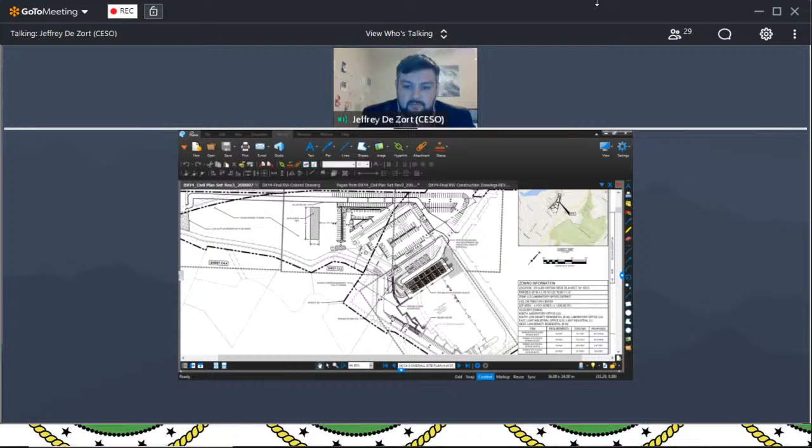If Jeff De Zort can share his screen, just so I can reorient the board. I know it hasn't been very long since we've been back, but just to put things back in a visual perspective for you. Gene or Cheryl, could you give me permission to share my screen, please? Thank you. Are you good, Jeff? I got it. It should be popping up here momentarily. Okay. Should be seeing a picture of the site plan. Yep. Okay. Thank you.

So as you recall, we were here a few months ago. We received site plan approval on July 8th of this year for work related to Amazon's proposed delivery station at 200 and 400 Ortani. We are here tonight requesting amended site plan approval for some minor technical amendments to the plans, as I will let Jeff go into more detail in a few minutes. Those changes include revisions to the stormwater management design and the inclusion of a new retaining wall. The new stormwater management design is now being proposed as an underground detention system as opposed to an above ground detention system as was previously approved by this board. The amended stormwater management design will still provide the same quality and quantity mitigation as this board previously approved, and will also comply with all the town, county, and state requirements.

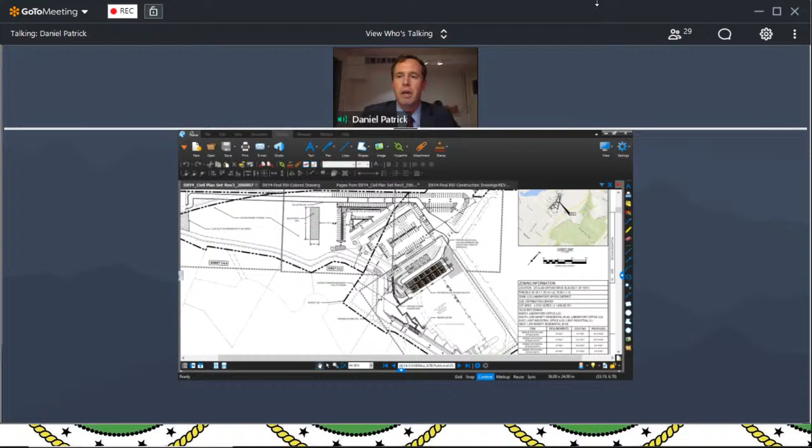Amazon is also still including the catch basin inserts, which we previously proposed as requested by this board to achieve the desired oil and water separation. With regard to the retaining wall, it will be an approximately 122-foot long retaining wall. It will stand between 2.5 to 5.5 feet tall. It'll be located between the Associate Drive and the van loading area, where Jeff is pointing at right now.

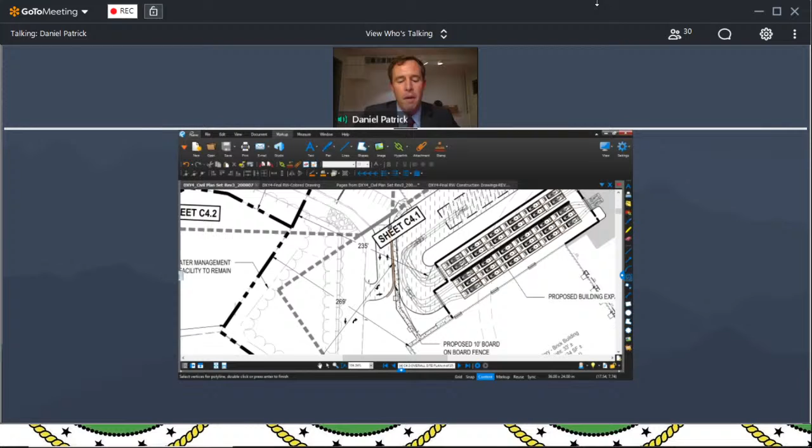As I will let Jeff show in a minute, we also have provided the site diagrams, or the line of sight diagrams that this board previously requested with regard to the actual building itself. As shown on those diagrams, Jeff can walk through and provide a little more detail about why this is required and the engineering reasoning behind it. But the line of sight diagrams do show that the retaining wall is not visible from the property line, so we're not expecting any aesthetic impacts to be created.

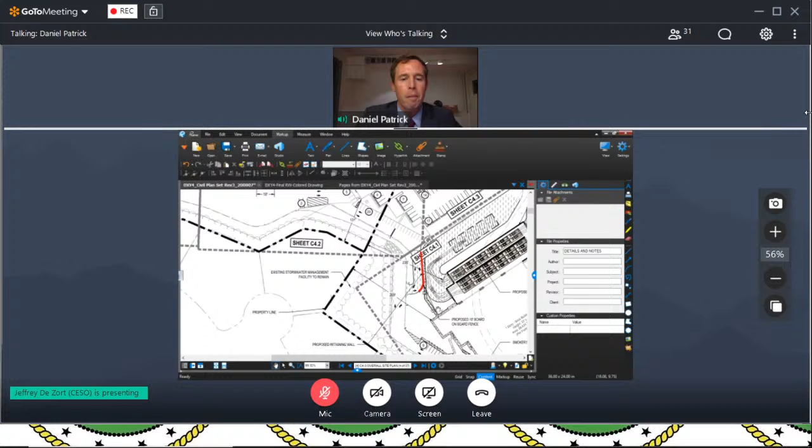So that's just a brief overview of the amendments that we're here for approval of tonight. I will turn over to Jeff in a moment, but as indicated, we're hoping to obtain approval for these amendments. They're very technical in nature. We don't think they change the project or the site significantly. We are also asking that this board waive the need for this application to be referred to the ACABOR. It's our understanding that the retaining wall would require ACABOR approval, but in this instance, since the remainder of the site has already been approved and these changes are rather minor and will not be recognized or noticeable off-site, we think it's appropriate for these minor improvements to not be referred to the ACABOR, if that board feels more inclined to waive that. So I will turn over to Jeff right now and ask him to go over a little more detail about the proposal and the reasoning for these two changes.

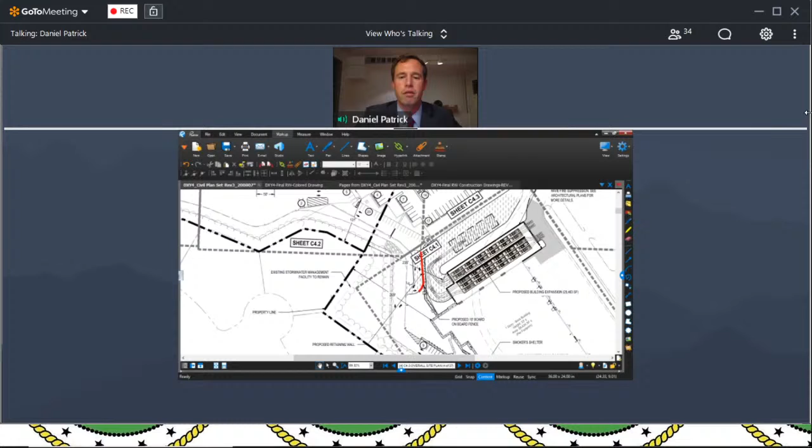Great. Thank you, Dan, and thank you, board, for taking the time to hear our proposal. So as Dan mentioned, the two major site amendments or revisions to our approved site plan are in regards to the stormwater management system as well as the retaining wall.

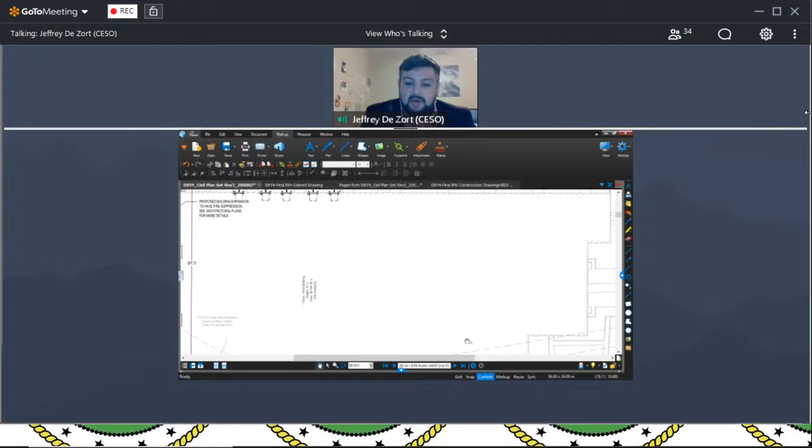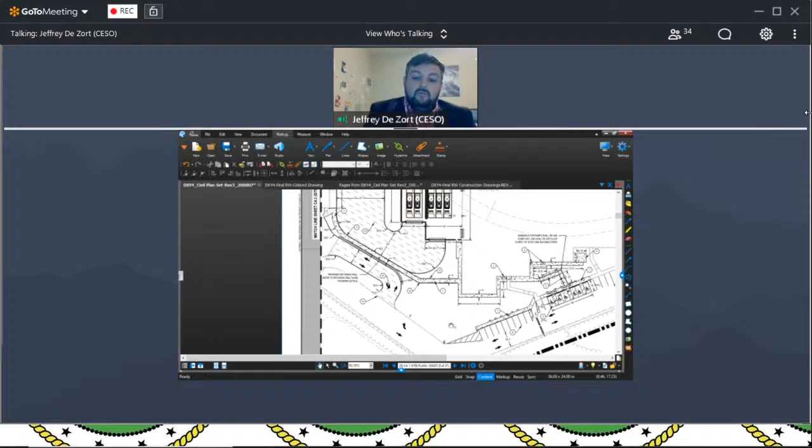For the stormwater management system, originally proposed was an above ground detention pond located in the southwest corner of the building in a grass area. It was in this area where the original pond was to be placed, and that was going to be an infiltration pond where stormwater for the site would flow, discharge, and fill up. Then, as the pond filled, it would overflow and would be piped to the existing detention basin that's on the site.

Due to the geotechnical analysis performed on the infiltration, as well as some minor changes in the grading of the site, the above ground detention basin was no longer a feasible option for us from a sheer volume perspective. We just couldn't get the amount of volume needed to meet all of the local, county, and state regulations regarding water volume and water quality.

So our alternative was to redesign and install an underground detention basin. Hydraulically, the underground detention basin acts the same way as an above ground pond. All the water will sheet flow from the site to catch basins.

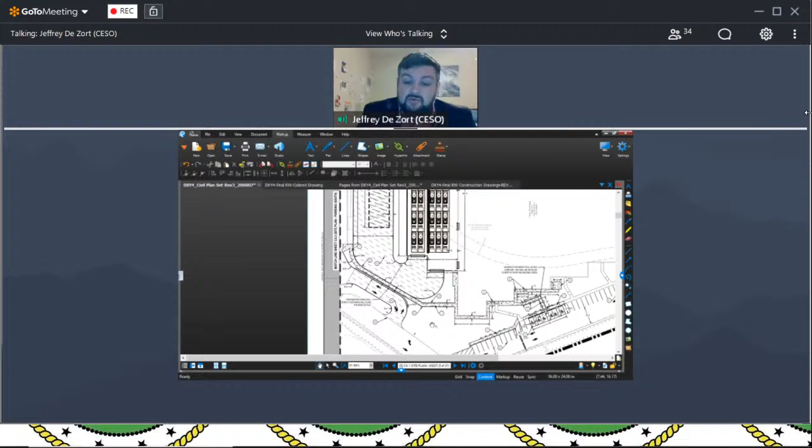From the catch basins, they'll enter into an underground detention system, which I have a picture of. It's a StormTech system made by ADS. Here's a picture - it's an arced chamber, a plastic chamber that's buried in a bed of gravel and connected by plastic pipes.

As the water flows into the catch basins that have inserts for water quality and for oil and water separation, it'll flow into these underground chambers - actually it'll flow first into what they call an isolator row. That isolator row provides additional water quality measures by trapping any type of floatables or similar material that might enter into the system. It'll go into that isolation chamber, collect there, and won't have the ability to leave.

That would be a maintenance item that is part of the maintenance and operation plan required by the town and that needs to be signed. Regular maintenance would occur to take out any type of floatables or built up sediment that might occur. From the underground detention system, the stormwater will again flow from there to the already existing detention basin.

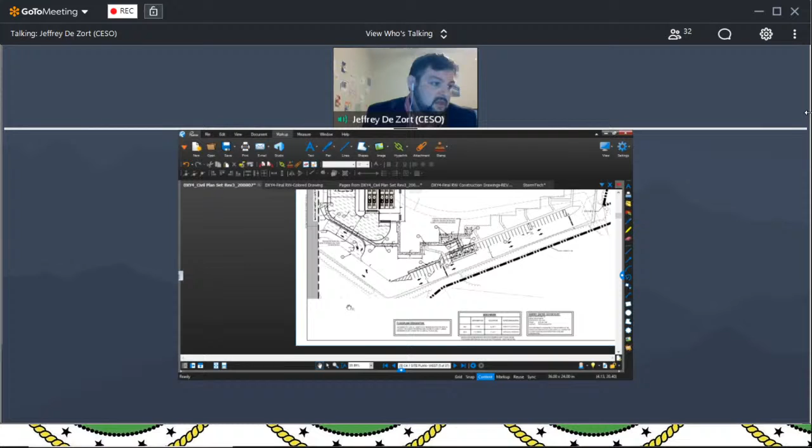That's located on the southwest corner of the property. The detention basin is located down here. If I go back to the overall site plan, you can see here's the above ground detention existing stormwater management facility. Water is going to flow to the underground system, and then from there we'll exit out to the existing facility.

So all of the water volume, the quality, all of the actual metrics that need to be met in terms of the code for the state, the city, the town, and the county are all still being met. It's just really a different means of treating or holding the stormwater. Again, that was due to the grades and the infiltration rates we had received when we tested.

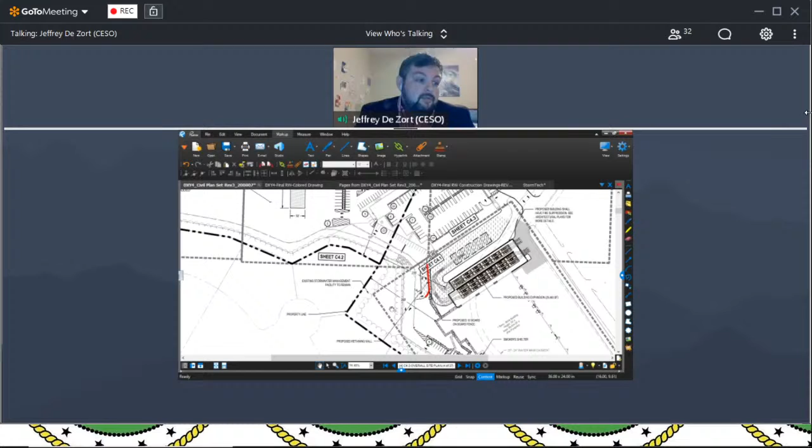The town engineer made a recommendation that infiltration rates be completed for our new underground detention system in that location. We have done that. We have submitted the results of that infiltration testing that confirm our assumptions and confirm the design we've proposed that's in front of the board - that the infiltration rates and groundwater level in that location won't adversely affect the design. So basically what we have is a design that we've confirmed works and is doing everything it's supposed to do.

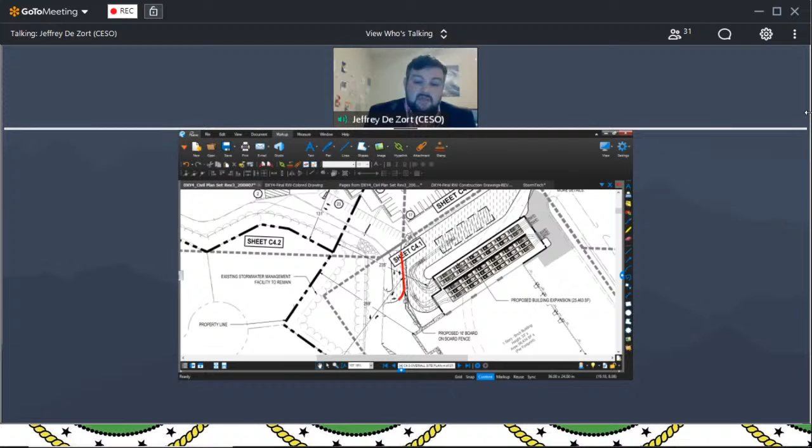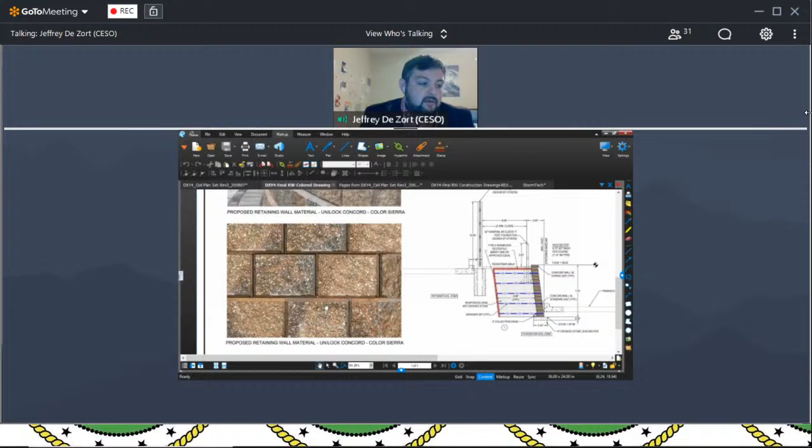The next piece is the retaining wall. I have a picture here of basically a rendering of what that wall would look like. It's a 2.5 foot to 5.5 foot total height wall, running along this drive aisle. It's a separation between the drive aisle and the loading area that's up on the top of the hill. From the color drawing here, you can see we're using a Unilock Concord wall with the Sierra color to match the architecture and color scheme of the existing building.

And then here's a cross-sectional view. You can see at the bottom here would be the drive aisle. It will have a wall. On top of the wall will be a handrail for pedestrians, a sidewalk, and then the 10-foot board-on-board privacy fence that was previously approved by the planning board.

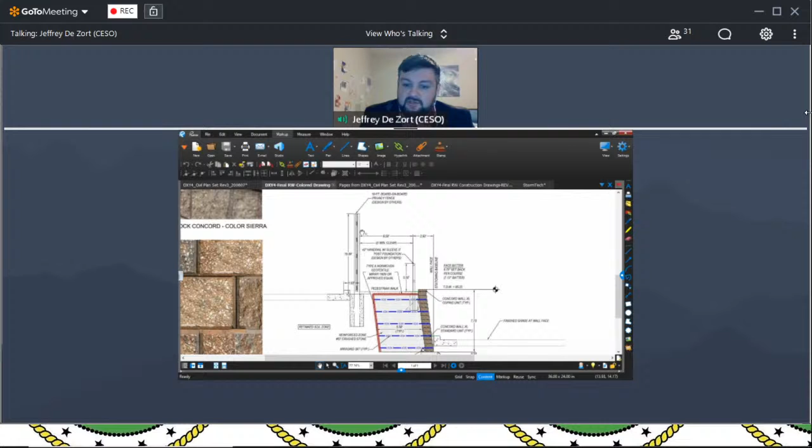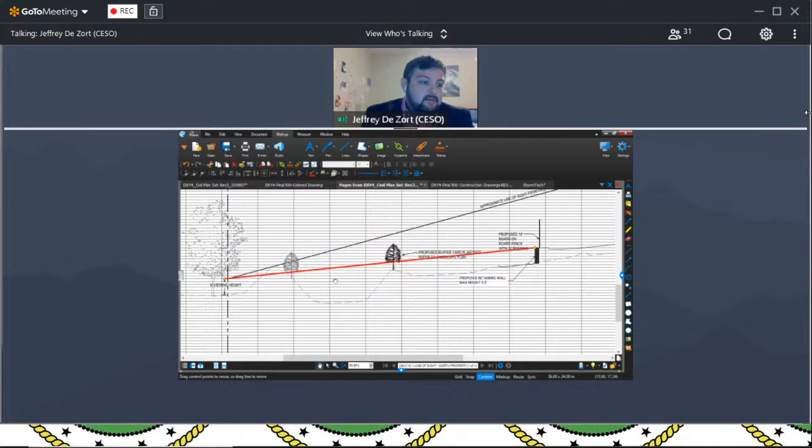Looking at the line of sight, we've adjusted this exhibit to show the max height, showing the max height in this case, a 5.5 foot proposed retaining wall. You can see if a person at 6 foot height is viewing or trying to view the retaining wall with this red line, they're actually going to hit the ground before they can see anything. They're going to hit the berm and the bank of the detention pond, so they're actually not going to ever be able to see this.

The only people that would be able to see this wall are those that are on site. And I would say that those on site would see that it complements the architecture and the color scheme that's already present.

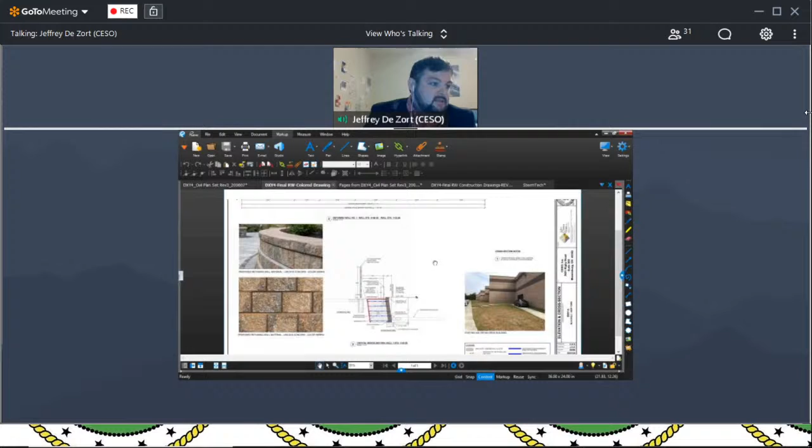Again, this line of sight is not changed from the previous approval. And as Dan said, the total length of the wall proposed is about 122 linear feet that go along the back of the curb of that drive aisle.

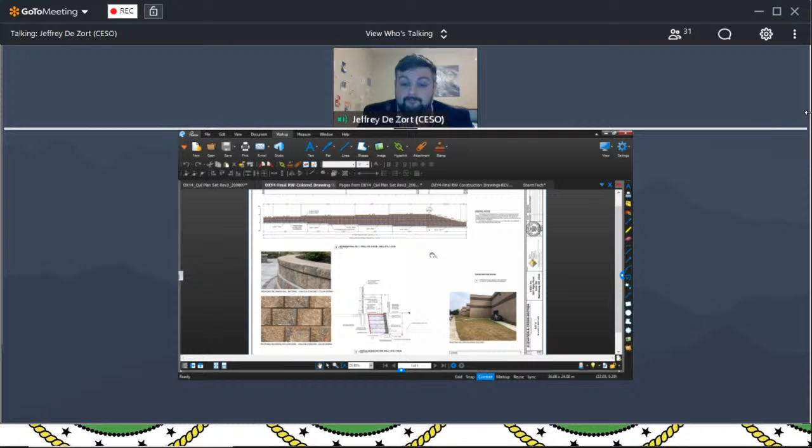I'd be happy to answer any questions the board might have regarding the stormwater or the retaining wall. Is there anything else? No, I believe that's all we have. So those are the changes that are being proposed. I don't think there's anything else.

Okay, then let's get into the consultants' reports. We have Jane Slavin's September 21st letter, which has 2 items.

Ms. Slavin, you have said on the bottom that ACABOR review and approval is required. Is that going to be necessary, being that the wall cannot be seen off the property?

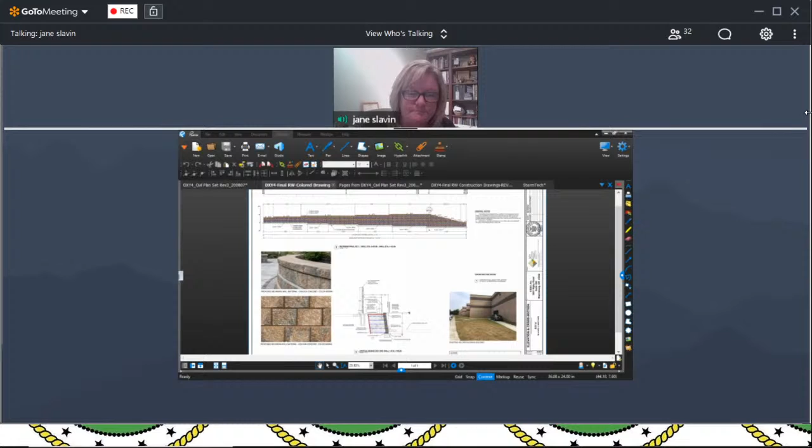Mr. Chairman, that is a typical comment, and there have been times when the planning board has waived those requirements. I think the presenter did a good job of demonstrating what the wall will look like. Okay, because I know the applicant had said something about that. I wanted to just check with you. Thank you very much.

Okay, Department of Environmental Management and Engineering, Bruce Peters, dated September 2nd. He has 18 items. Okay, any questions on those?

Okay, Bruce Peters, September 23rd, drainage review recommendations. The proposed action has provided significant drainage information that demonstrates that potential significant adverse impacts with respect to drainage can be mitigated. We therefore recommend that the DXY4 delivery station site plan be approved for drainage, subject to the above project comments, of which there are 4.

Okay, Rockland County Sewer, dated May 26th, just saying that they do not object to Orangetown Planning Board serving as lead agency, and that the project does not affect the district sewers.

And we have a memo dated September 18th from Michael Betterman, Chief Fire Inspector. Fire prevention has no comments in regard to the underground detention system. That's all I have. Is there anything else, Cheryl? No, that's it. Thank you very much.

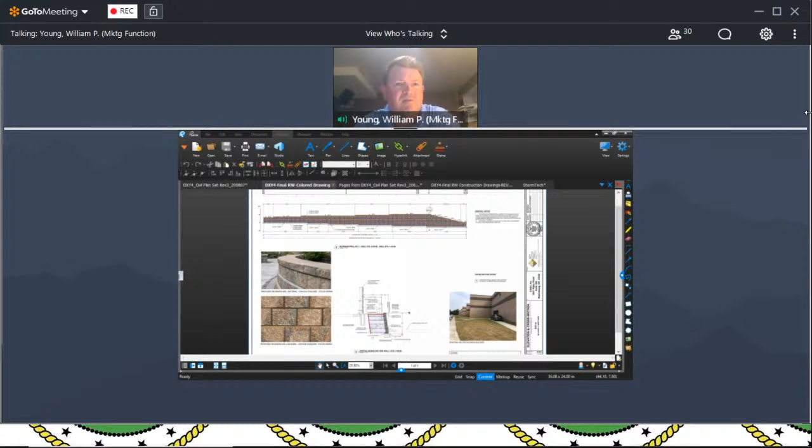Okay, I'm going to open it up to the board. Mr. Young? No comments, Mr. Chairman. Also, if Director Slavin doesn't have a problem bypassing ACABOR, neither do I. Okay, thank you very much.

Mr. Mandel. Yes, just a couple of quick questions. The retaining wall, what was the reason for adding it now rather than when you first submitted?

Mike, your voice is very garbled. I don't know if anybody else heard that. Not again, it was clear before. Can you hear me now? No. Okay, Mike, I'll repeat. I can hear you, I'll repeat it.

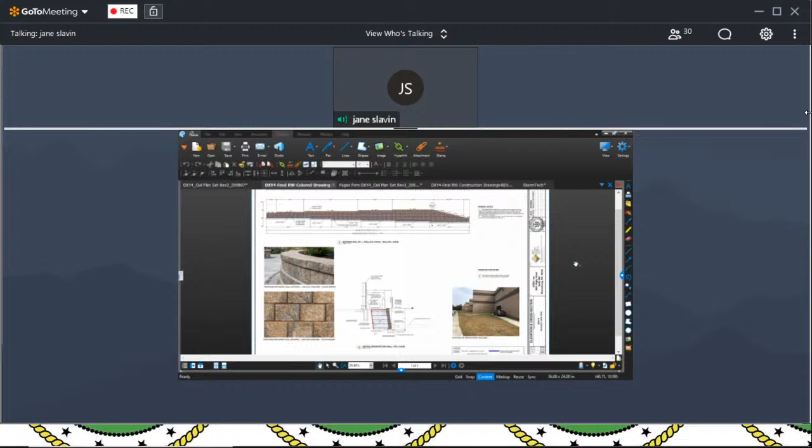His question was, why is the retaining wall being shown in this application and it was not shown in prior applications? Sure, so the reason behind that is when we made the switch per the previous application to put in a proposed building addition versus the building canopy, after we went through and did the fine-tune grading of the plan in order to meet all the conditions of the board, what we found was there were some grades that were undesirable to enter and exit the building. So the best mitigation was to put in a nice looking retaining wall that allows pedestrians a safe place without any interference with traffic, as well as being able to meet those grades so that it's a more desirable grade from a driving perspective.

Okay, second question. Regarding DEME item #2, you said you had spoken with them regarding the determination of groundwater elevations. Is that the 3 things he asked for—soil borings, the perc test, and determination of groundwater elevations? Have they been completed yet? Yes, they have been.

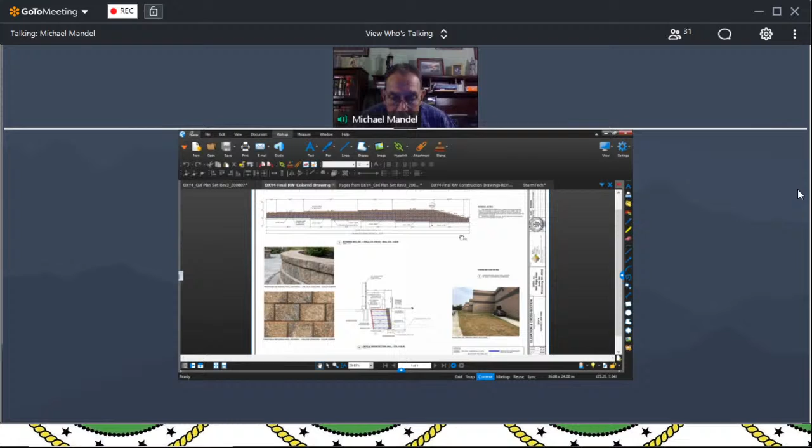And I have no objection to bypassing ACABOR. Okay, thank you, Mr. Mandel. Mr. McCory.

Thank you, Chairman. Just a couple questions.

With the retaining wall, you're saying it's between 2.5 and 5.5 feet high, and then the 10-foot board-on-board fence will be on top of that? Will that rise and fall with the elevation, or in some places will it be 15 feet? Correct, the 10 foot is just a standard 10-foot board-on-board fence, and that'll go along with the grade. I have no problem with the ACABOR waiver since it's not a big impact and the neighbors can't see it.

So that's my only comments. Thank you very much. Mr. Dell.

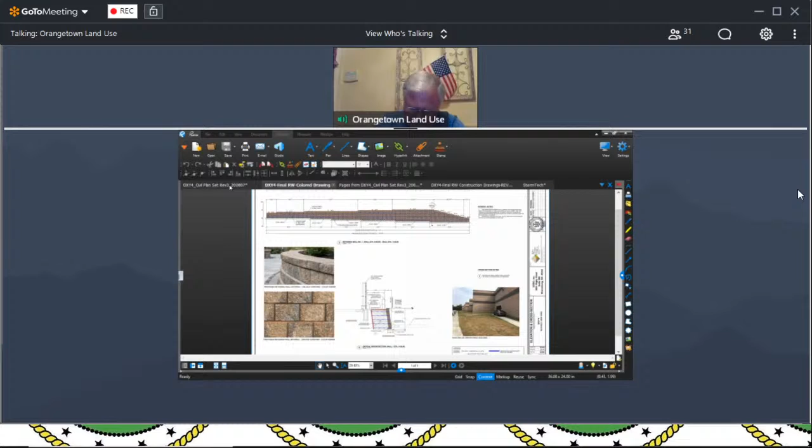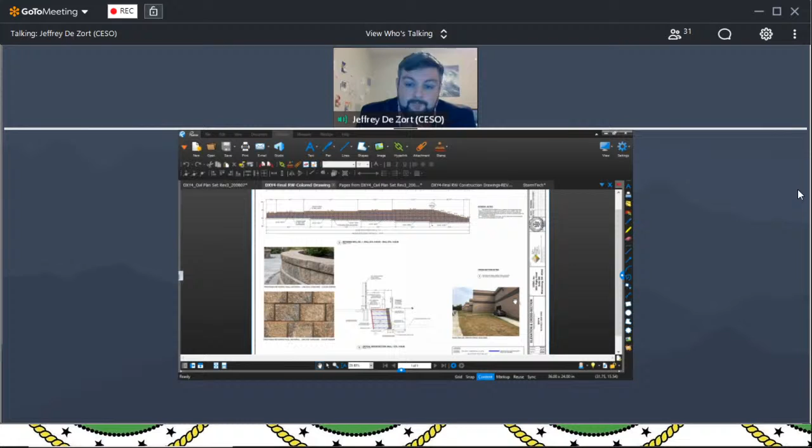Thank you, Mr. Chairman. A couple of questions. First of all, I believe your existing detention basin, maybe you can straighten this out for me. Does that have a micro pool and a forebay, or is it one of the older style ones? The existing detention basin is a wet pond, so it wouldn't have a micro pool or a forebay.

Now, I remember when that was built, it wasn't a wetland, I don't think at the time. So it's become a wetland, is that what you're saying? No, it's a wet pond. Wet pond, okay, you said wetland. Okay, I understand. All right, maybe that should be sufficient.

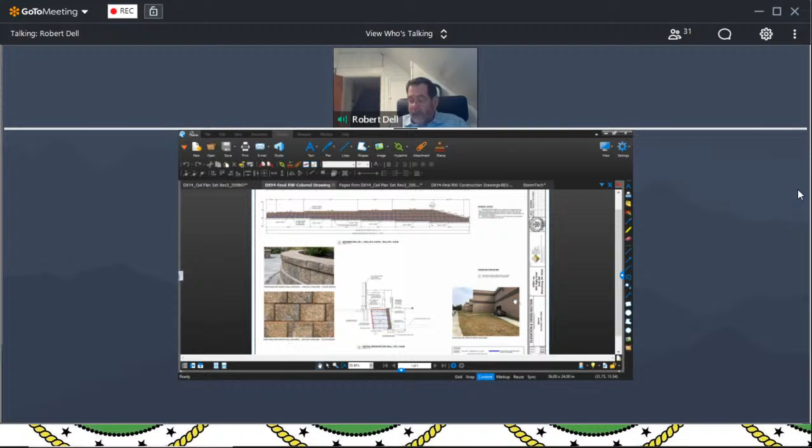On your sheet, let me try to look at it here. C7.4. In the upper left-hand corner of that, you have your oil separators and your debris removal system there. You see them? I don't know if they're on the right page. I'm trying to pull them up on the page here. C7.4.

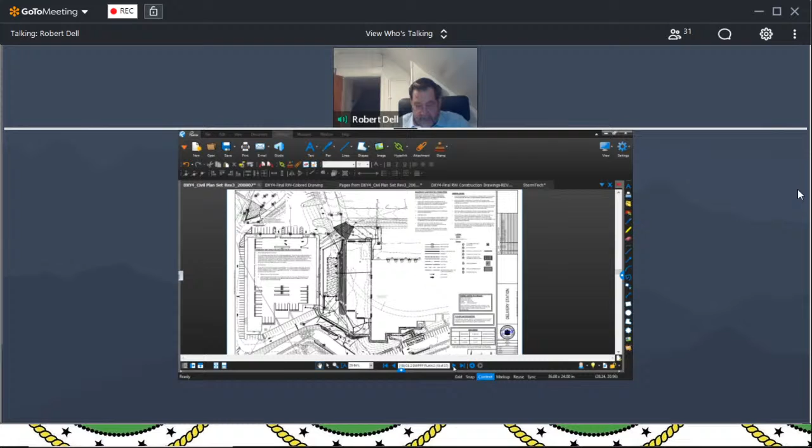Yes, that's correct. Okay, in the upper left-hand corner, you're showing, which is nice, I don't see any dimensions on this. I assume it's standard size, but I think it would help if it had some dimensions on this.

And is it indicated on the plan that all of the proposed catch basins will have this system in there? Yes, sir, the catch basins that are directly upstream of the underground detention system have the snouts installed, and those are called out on the utility plan. Okay, as long as it's clearly indicated, I don't have trouble finding that detail.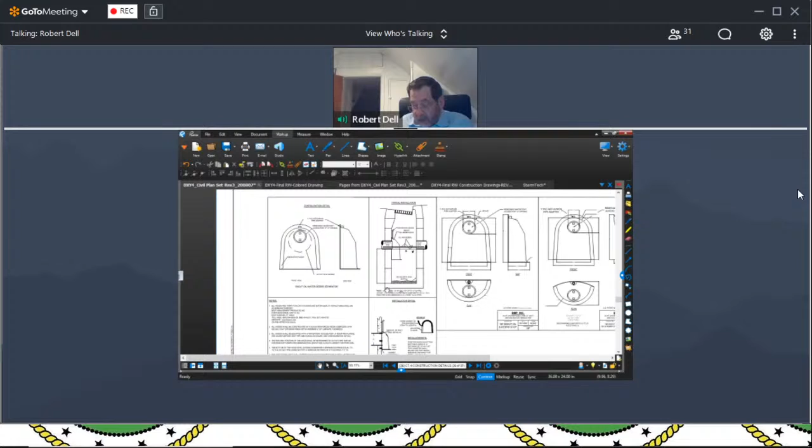Next question I have for you. This would be sheet C5.7. Okay, these are the construction details of what you're proposing to put in there, is that true? That's correct, the StormTech system. Okay, I think what would help is if you had a clearly marked larger scale overall plan, maybe an inch equals 30, or whatever you need to do to show precisely what's happening.

One other question, obviously, is do you have any maintenance schedules for cleaning out the oil and debris separators? Yeah, so the standard snout units or the Enviro hood units, they come with their own standard operating procedure and maintenance program that's built in from the manufacturer. Those manufacturer brochures and maintenance plans would be included into the stormwater operation and maintenance agreement that has to be signed by the landowner.

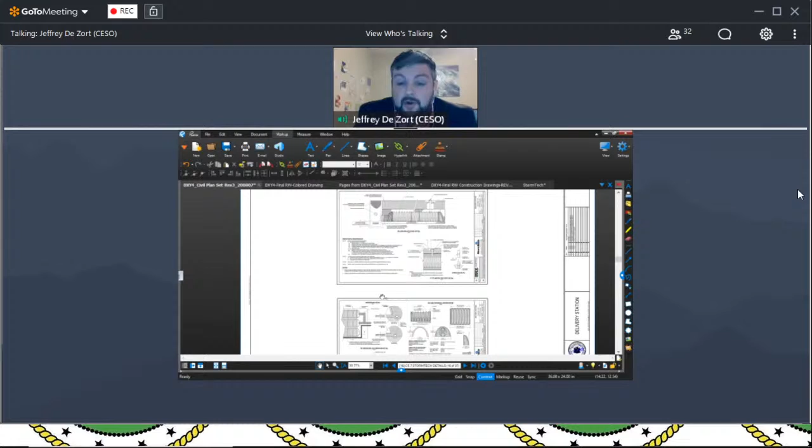All right, next question. It may sound kind of odd when I initially ask it, but it may make sense after I get your response. You're having a lot of vehicles there. Now, how many of them are dedicated Amazon vehicles for the direct delivery, like small minivans, or how many of them are independent vendors who you'll be hiring? Do you have any idea?

I would probably defer to Taryn on the numbers of the vans specifically. Can he answer that? Yeah, I know we had provided this number during the previous round. I don't have that detail in front of me. If you give me a few minutes here, I can try to pull that up.

Okay, well, what's more important, what are the approximate ages of the vans that you're providing? Did you say approximate number of the vans? Yes. I'll have to look it up, I don't want to throw out the wrong number. Okay, yeah, give me a minute, I can look that up and get back to the board.

Okay, just to let you know where I'm going with this, so it'll make a little bit more sense. I know your company is making a big push to put in electric vehicles, and I see no indication here of any electric vehicles. I just want to make sure that Orangetown isn't the area where you put all the older vehicles and put the electric vehicles in other communities.

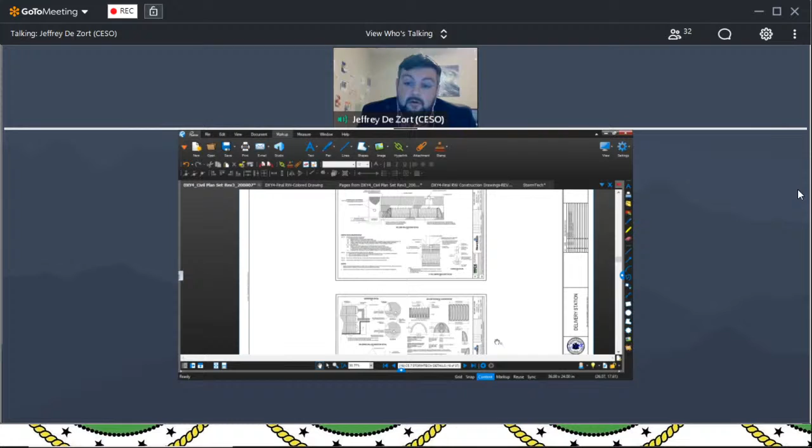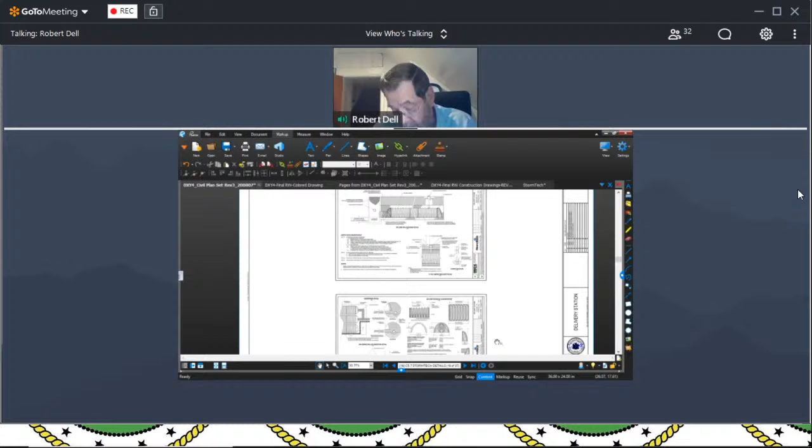Absolutely. Final thing, I think I would be in favor of this not being reviewed by ACABOR, not only because of the line of sight, but because of the distance from the property line and the fact it's like a de facto campus situation. And you've certainly gone out of your way to see that what you're putting in there matches your building and is, from my view, more than aesthetically pleasing for what you have to do. Okay, that's all my questions, Mr. Chairman. Thank you very much.

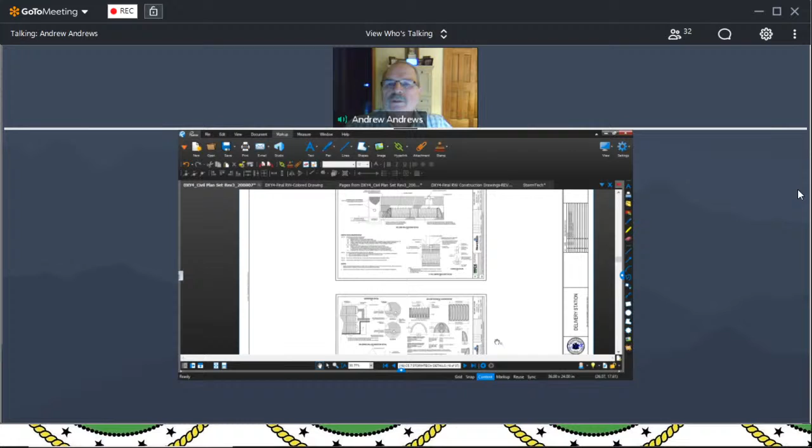Thank you, Mr. Dell. Mr. Andrews? Just a couple of comments. The wall looks really, really good. I'm in favor of waiving ACABOR. And I really like the idea of the underground water retention center as opposed to above ground. So it looks really good. Thank you, gentlemen.

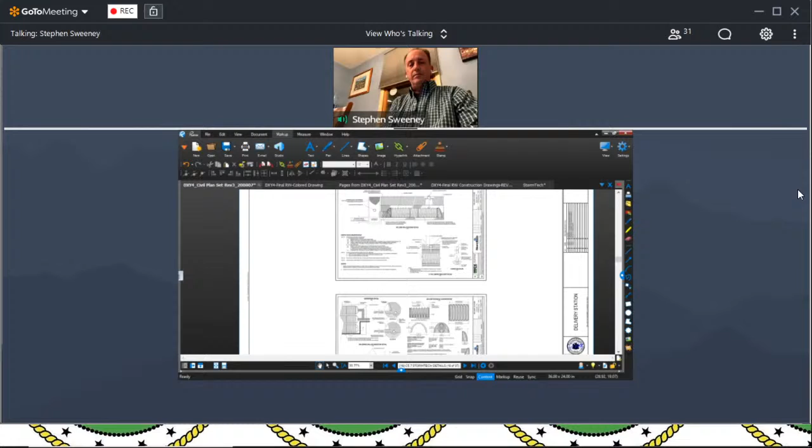That's it. Thank you. Mr. Sweeney? Yes, thank you. I agree with the comments of others, and I also think that I don't see a need to go for ACABOR approval. I have no other comments at this time. Okay, thank you, sir. Mr. Bond? I'm okay with it. I don't see any reason that they have to go to ACABOR either.

Thank you very much. Okay, I'm going to open it up to the public. Is there anybody from the public that wishes to speak on this? Okay, one more time. Is there anybody from the public that wishes to make any questions or comments on this application? Okay, hearing none, I'll ask for a motion to close the public.

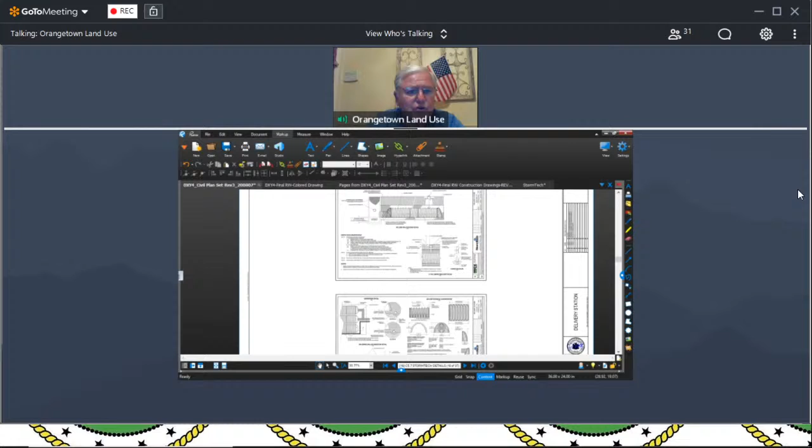Motion to close the public portion, Mandel. Mr. Mandel makes the motion. Okay, do I have a second? Andrew seconds. Thank you, sir. Okay, I'm going to ask if there's any no votes. Hearing none, it's unanimously passed. Okay.

What they're here for is to reaffirm SEQRA and to amend the property with the underground detention system. I'm going to start with reaffirming SEQRA. Can I have a motion for lead agency? Motion for lead agency, Mandel. Okay, Mr. Mandel, lead agency. Do I have a second? Andrew seconds. Okay, anyone opposed? Okay, hearing none, all approved.

Okay, a motion for reaffirming SEQRA. Motion for reaffirming, Mandel. Mr. Mandel, do I have a second? Andrew seconds. Okay, is there any opposition to it? Okay, hearing none, that's approved.

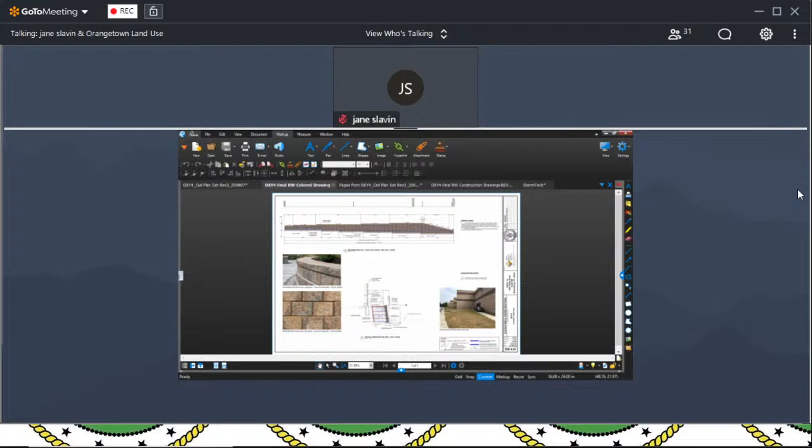Even going back to Mr. Peters' number 2, and he keeps bringing this up - I felt if we stuck to it last time, we wouldn't be in this situation now. But he wants these tests performed prior to this proposal receiving final approval. I did speak to Mr. Peters about that, and he informed me he doesn't mind if they get final, just that the plans can't be signed off on until all conditions are satisfied.

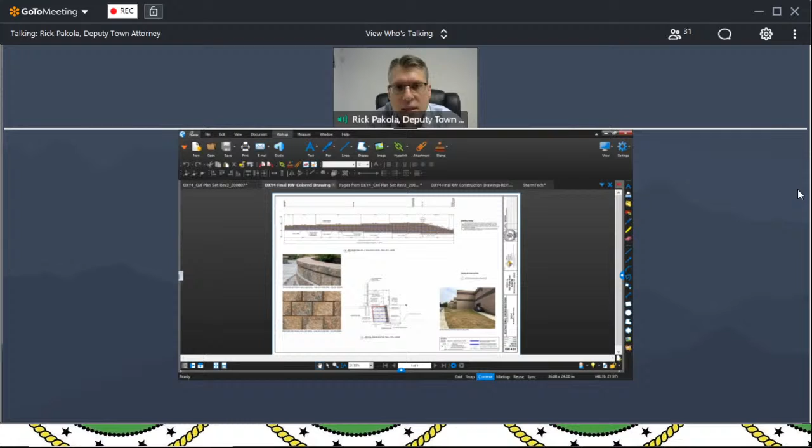Now I understand that, because I talked to him about this too, and he says, well, that's why I put it in there. So if you talk to him and he's willing to let this proceed into final, as long as all the conditions are filled, then I think we have no problem with it. I'm going to go ahead and ask for a motion for final with conditions.

Do I have a motion for final with conditions? Motion for final - Tom gives the motion. Okay, who was that? Motion for final with conditions.

Mr. Chair, I think they answered it, that they did do those 3 tests required by Bruce Peters. Mr. Chairman, yes, I can confirm the 3 tests were performed. The results were submitted with a memo noting that the assumptions made and the design put forth were more or less confirmed by our tests, and that the results and memo have been sent to Mr. Peters.

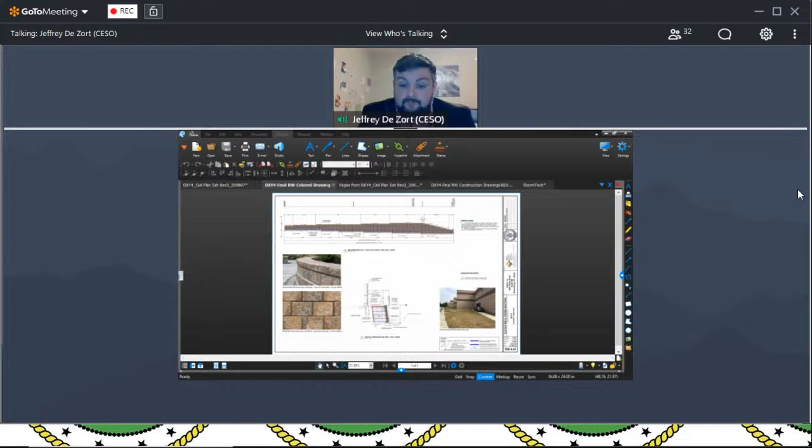Okay, motion for final with conditions, Mandel makes the motion. Jane Slavin, September 1st, has 2 conditions.

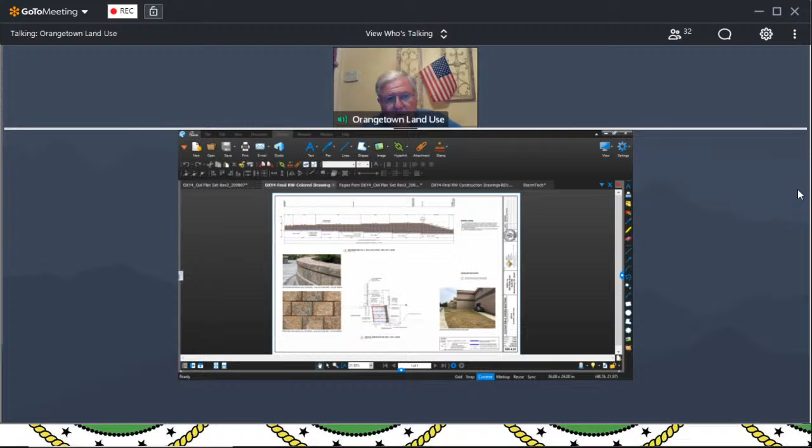Does the board wish to waive the applicant from going to ACABOR? Motion to waive ACABOR - who made it? Mandel. Mr. Andrew, second? Andrew seconds. Do I have any disagreement on them going to ACABOR? Is everybody in favor? I see no opposition, so everybody's in favor that they can bypass ACABOR.

So, Jane Slavin still has 2 conditions from the Department of Environmental Management and Engineering. Excuse me, one condition. I need a second on that motion to override the ACABOR review. Do I have a second? Andrew seconds. All in favor? Aye. No opposition.

So Cheryl, are you with me or am I messing you up? I got everything. No problem.

Department of Environmental Management and Engineering, Bruce Peters, September 2nd, has 18 items. Booker's September 23rd letter has 4 items. Rockland County Sewer has 2. Michael Betterman, September 18th, has no comments. And that's all I have.